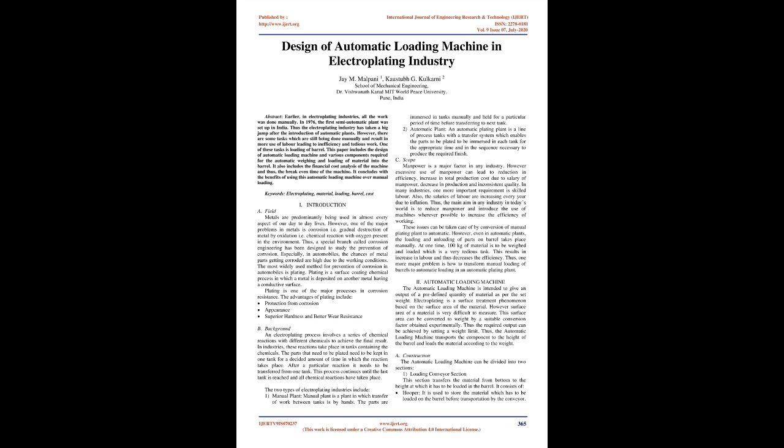The most widely used method for prevention of corrosion in automobiles is plating. Plating is a surface coating chemical process in which a metal is deposited on another metal having a conductive surface. Plating is one of the major processes in corrosion resistance. The advantages of plating include protection from corrosion, appearance, superior hardness and better wear resistance.

B. Background. An electroplating process involves a series of chemical reactions with different chemicals to achieve the final result. In industries, these reactions take place in tanks containing the chemicals. The parts that need to be plated need to be kept in one tank for a decided amount of time in which the reaction takes place. After a particular reaction it needs to be transferred from one tank. This process continues until the last tank is reached and all chemical reactions have taken place.

The two types of electroplating industries include: 1. Manual plant. Manual plant is a plant in which transfer of work between tanks is by hands. The parts are immersed in tanks manually and held for a particular period of time before transferring to next tank. 2. Automatic plant. An automatic plating plant is a line of process tanks with a transfer system which enables the parts to be plated to be immersed in each tank for the appropriate time and in the sequence necessary to produce the required finish.

C. Scope. Manpower is a major factor in any industry. However, excessive use of manpower can lead to reduction in efficiency, increase in total production cost due to salary of manpower, decrease in production and inconsistent quality. In many industries, one more important requirement is skilled labor. Also, the salaries of labor are increasing every year due to inflation.

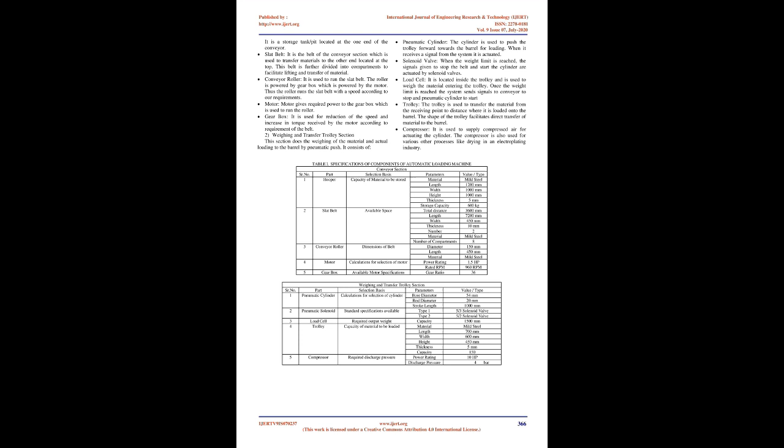Thus, the main aim in any industry in today's world is to reduce manpower and introduce the use of machines wherever possible to increase the efficiency of working. These issues can be taken care of by conversion of manual plating plant to automatic. However, even in automatic plants, the loading and unloading of parts on barrel takes place manually. At one time, 100 kilograms of material is to be weighed and loaded, which is a very tedious task. This results in increase in labor and thus decreases the efficiency. Thus, one more major problem is how to transform manual loading of barrels to automatic loading in an automatic plating plant.

2. Automatic loading machine. The automatic loading machine is intended to give an output of a predefined quantity of material as per the set weight. Electroplating is a surface treatment phenomenon based on the surface area of the material. However, surface area of a material is very difficult to measure. This surface area can be converted to weight by a suitable conversion factor obtained experimentally. Thus the required output can be achieved by setting a weight limit. Thus, the automatic loading machine transports the component to the height of the barrel and loads the material according to the weight.

A. Construction. The automatic loading machine can be divided into two sections. 1. Loading conveyor section. This section transfers the material from bottom to the height at which it has to be loaded in the barrel. It consists of: Hopper. It is used to store the material which has to be loaded on the barrel before transportation by the conveyor. It is a storage tank/pit located at one end of the conveyor. Slat belt. It is the belt of the conveyor section which is used to transfer materials to the other end located at the top. This belt is further divided into compartments to facilitate lifting and transfer of material.

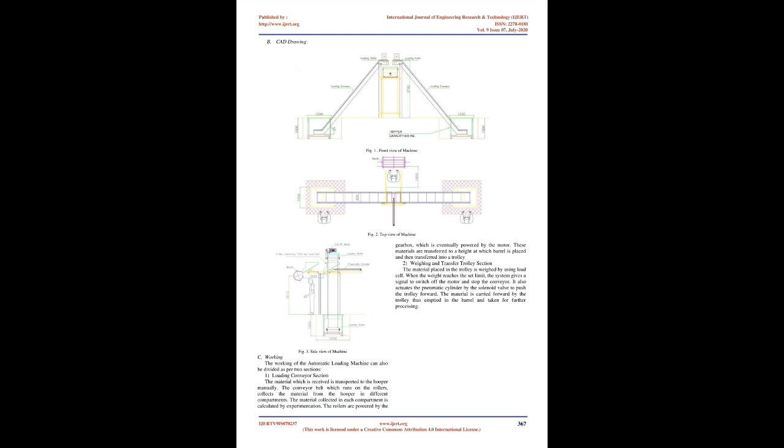Conveyor roller. It is used to run the slat belt. The roller is powered by gearbox which is powered by the motor. Thus the roller runs the slat belt with a speed according to our requirements. Motor. Motor gives required power to the gearbox which is used to run the roller. Gearbox. It is used for reduction of the speed and increase in torque received from the motor according to requirement of the belt.

2. Weighing and transfer trolley section. This section does the weighing of the material and actual loading to the barrel by pneumatic push. It consists of: Pneumatic cylinder. The cylinder is used to push the trolley forward towards the barrel for loading. When it receives a signal from the system it is actuated. Solenoid valve.

When the weight limit is reached, the signals given to stop the belt and start the cylinder are actuated by solenoid valves. Load cell. It is located inside the trolley and is used to weigh the material entering the trolley. Once the weight limit is reached, the system sends signals to the conveyor to stop and the pneumatic cylinder to start.

Trolley. The trolley is used to transfer the material from the receiving point to a distance where it is loaded onto the barrel. The shape of the trolley facilitates direct transfer of material to the barrel. Compressor. It is used to supply compressed air for actuating the cylinder. The compressor is also used for various other processes like drying in an electroplating industry.

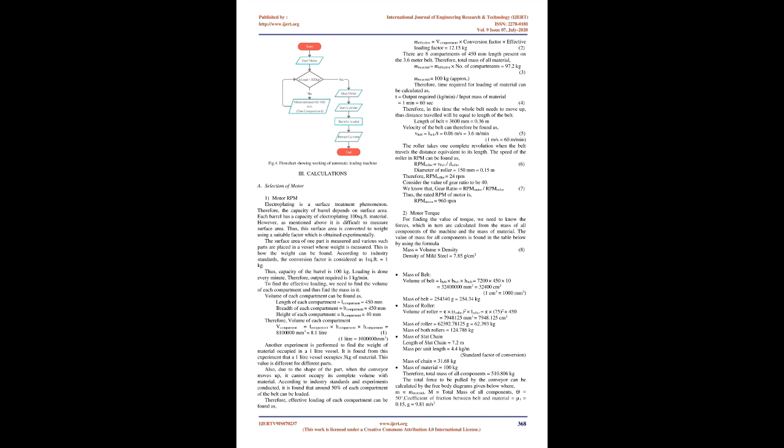C. Working. The working of the automatic loading machine can also be divided into two sections. 1. Loading conveyor section. The material which is received is transported to the hopper manually. The conveyor belt which runs on the rollers collects the material from the hopper in different compartments. The material collected in each compartment is calculated by experimentation. The rollers are powered by the gearbox, which is eventually powered by the motor. These materials are transferred to a height at which the barrel is placed and then transferred into a trolley.

2. Weighing and transfer trolley section. The material placed in the trolley is weighed by using a load cell. When the weight reaches the set limit, the system gives a signal to switch off the motor and stop the conveyor. It also actuates the pneumatic cylinder by the solenoid valve to push the trolley forward. The material is carried forward by the trolley, thus emptied in the barrel and taken for further processing.

3. Calculations. A. Selection of motor. 1. Motor RPM. Electroplating is a surface treatment phenomenon. Therefore, the capacity of the barrel depends on surface area. Each barrel has a capacity of electroplating 100 sq. feet of material. However, as mentioned above, it is difficult to measure surface area. Thus, this surface area is converted to weight using a suitable factor which is obtained experimentally. The surface area of one part is measured and various such parts are placed in a vessel whose weight is measured. This is how the weight can be found.

According to industry standards, the conversion factor is considered as 1 sq. foot equals 1 kilogram. Thus, capacity of the barrel is 100 kilograms. Loading is done every minute. Therefore, output required is 1 kg/min. To find the effective loading, we need to find the volume of each compartment and thus find the mass in it. Volume of each compartment can be found as follows.

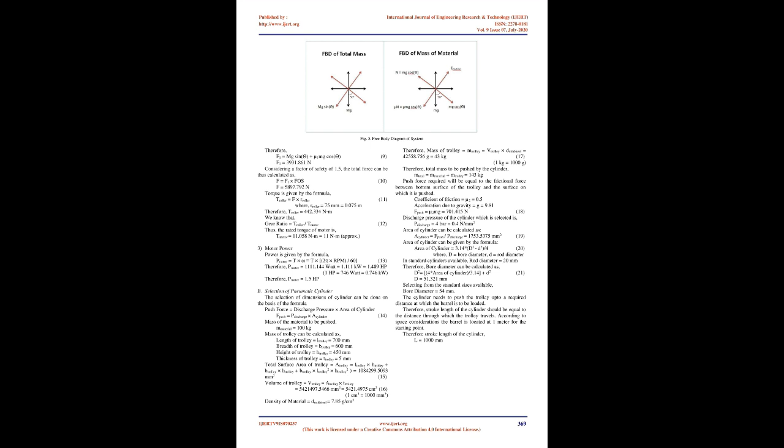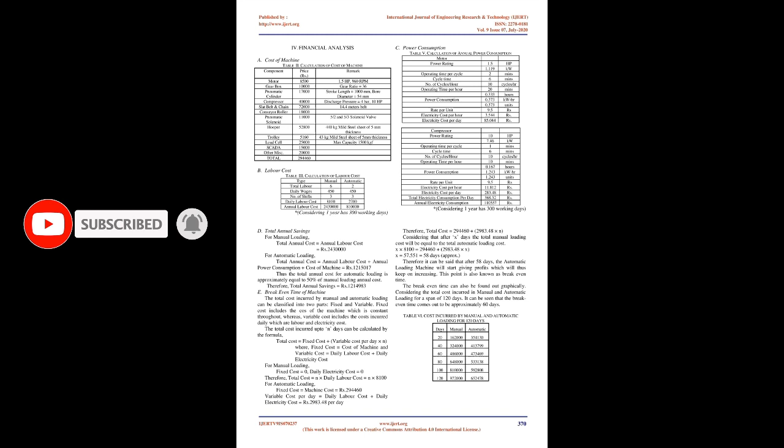The total force to be pulled by the conveyor can be calculated by the free body diagrams given below, where m equals material, M equals total mass of all components, coefficient of friction between belt and material equals 0.15, g equals 9.81 m/s². 3. Motor power.

B. Selection of pneumatic cylinder. The selection of dimensions of the cylinder can be done on the basis of the formula: push force equals discharge pressure times area of cylinder. Mass of the material to be pushed.

4. Financial analysis. A. Cost of machine. B. Labor cost. C. Power consumption. D. Total annual savings. For automatic loading. Total annual cost equals annual labor cost plus annual power consumption plus cost of machine, equals Rs. 1215017. Thus the total annual cost for automatic loading is approximately equal to 50% of manual loading annual cost. Therefore, total annual savings equals Rs. 1214983.

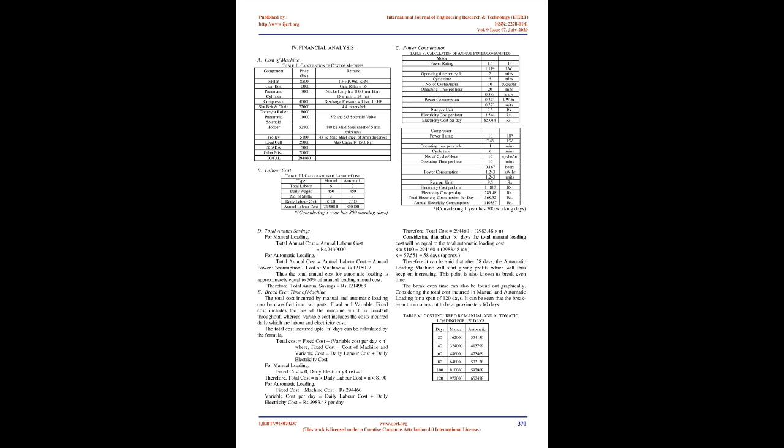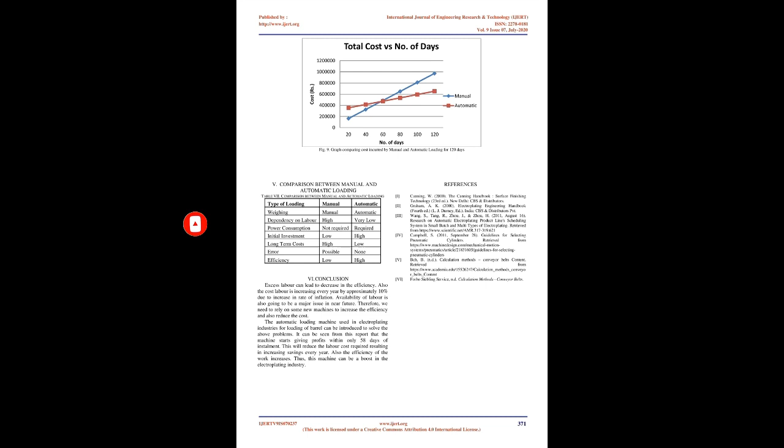E. Break-even time of machine. The total cost incurred by manual and automatic loading can be classified into two parts, fixed and variable. Fixed cost includes the cost of the machine, which is constant throughout, whereas variable cost includes the costs incurred daily, which are labor and electricity cost. The total cost incurred up to n days can be calculated by the formula: total cost equals fixed cost plus variable cost per day times n, where fixed cost equals cost of machine and variable cost equals daily labor cost plus daily electricity cost.

For manual loading. Therefore it can be said that after 58 days, the automatic loading machine will start giving profits which will thus keep on increasing. This point is also known as break-even time. The break-even time can also be found out graphically, considering the total cost incurred in manual and automatic loading for a span of 120 days. It can be seen that the break-even time comes out to be approximately 60 days. 5. Comparison between manual and automatic loading.

6. Conclusion. Excess labor can lead to decrease in the efficiency. Also the cost of labor is increasing every year by approximately 10% due to increase in rate of inflation. Availability of labor is also going to be a major issue in the near future. Therefore, we need to rely on some new machines to increase the efficiency and also reduce the cost. The automatic loading machine used in electroplating industries for loading of barrels can be introduced to solve the above problems.

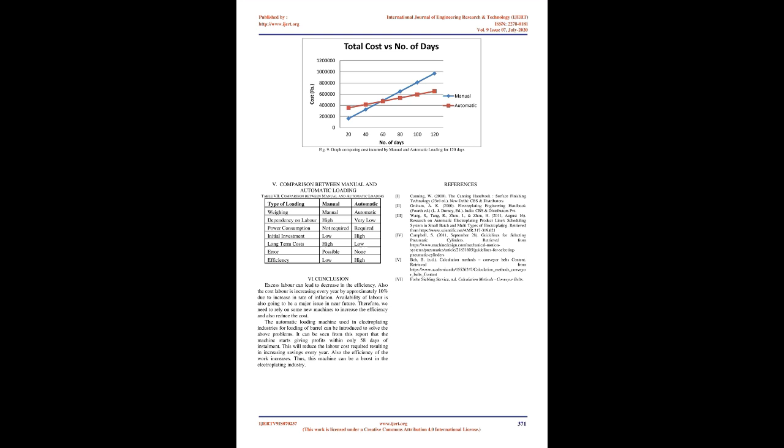It can be seen from this report that the machine starts giving profits within only 58 days of installment. This will reduce the labor cost required, resulting in increasing savings every year. Also the efficiency of the work increases. Thus, this machine can be a boost in the electroplating industry.